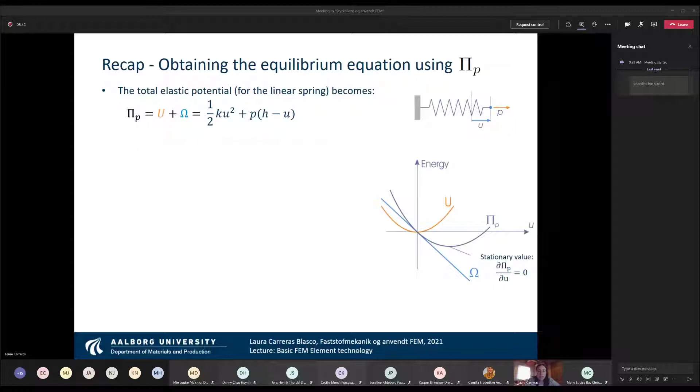So here we have some self-evaluation questions that we can discuss after going through this recap. But before that, I would like to know if you had any questions with respect to the principle of minimum total potential energy that you did last lesson with Simon, and the exercise using it to obtain the stiffness matrix of a system made of two springs, like this one here. You were asked to solve this system and find its stiffness matrix using the principle of total potential energy. Did you reach the solution?

More or less. I think we had trouble with the very last part, about isolating P and building the matrix itself. So you know how to get the equations, but converting the equations into matrix form is the step where you had some trouble. Yeah, okay.

So in the video you also have these slides, with a brief explanation on how to obtain the equations. But I will go through them quickly, just in case some of you didn't reach the point of getting the equations, okay?

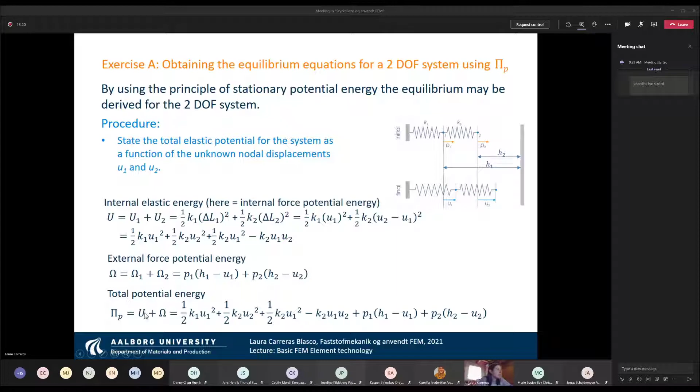In this way, we obtain the external force potential energy, and the total is the sum of these two. So here is the same equation as in this slide. And then we need to find the derivative of this expression with respect to both the displacement of point 1 and the displacement of point 2, because we need to do that for all the degrees of freedom of the system.

If we derive this expression with respect to displacement U1, we obtain this term here. And if we derive it with respect to the displacement of point 2, we obtain this term here.

And then it's just a matter of converting these two equations into matrix form. To do that, we need to first isolate the forces. In this case, the forces are quite isolated because there is nothing multiplying them. So if you just pick P1 here and move it to the right hand side of this equation, you will have it isolated here.

And then you can do the same for the second equation — this force is not multiplied by anything else, so it's just a matter of translating it to the right-hand side of this equation. So then you have both forces on the right side. Then it's a matter of finding what is multiplying the displacement of point 1 and what is multiplying the displacement of point 2.

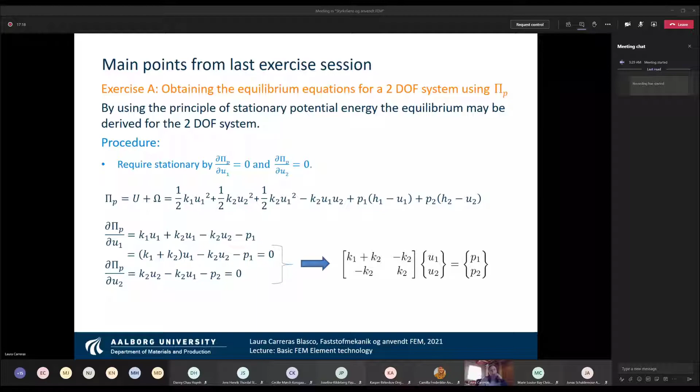Okay, that makes sense. And then I guess that these questions, you already answered them with Simon. Did you have time to answer this question with Simon? Otherwise, we can very quickly comment them.

So it was asked, the facility for listing reaction forces is used. Why is this a good way to check your model? Always checking the reaction forces is useful to check if the boundary conditions were correctly applied, because the reaction forces need to be always equal to the boundary conditions. It's also useful to check if you applied the correct units, which is a mistake usually made, because when you apply the boundary condition, sometimes you don't pay attention to the units, and maybe you want to apply a displacement in millimeters, and you ended up doing it in meters, and you don't pay attention to that.

So if you check the boundary conditions, the reaction force is a good way to check if you did it well in the definition. And then, the assembly is made for several individual parts. Does the generated mesh account for this? Yes, it does. By default, all the parts that are touching together are meshed together, so they are sharing nodes. They are modeled as if they were bonded, so they act together.

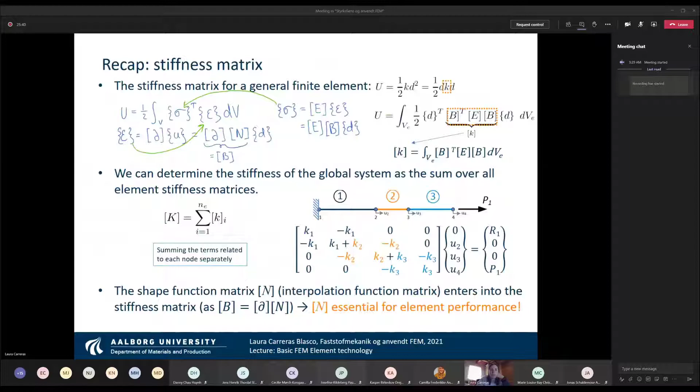Do you have any other question from last lecture? So do you have any question regarding all these concepts presented here? Okay, so I guess that silence means no.

So let's start with the topic of today. Today we will see different element technologies, okay? Basically we will see three types of elements: the solid ones, the beam ones, and the shell ones.

Let's start with the solid ones, which are the ones you already saw. The solid ones make no simplifications in terms of the degrees of freedom, so solid is what you have seen until now. You have a complex geometry that comes from reality, and that geometry you split into different elements, and each of these elements is what we call a solid element.

If we perform a 1D simulation, we will have only 1 degree of freedom per node. So for instance, if we had this element here, this node can only move in this direction, and this node can only move in this direction, because we are in a 1-dimensional simulation.

If we are in a 2-dimensional simulation, we will have 2 degrees of freedom per node — in this case, the horizontal and the vertical direction, for each of the nodes of the element. And if we are in a 3D simulation, we will have 3 degrees of freedom per node.

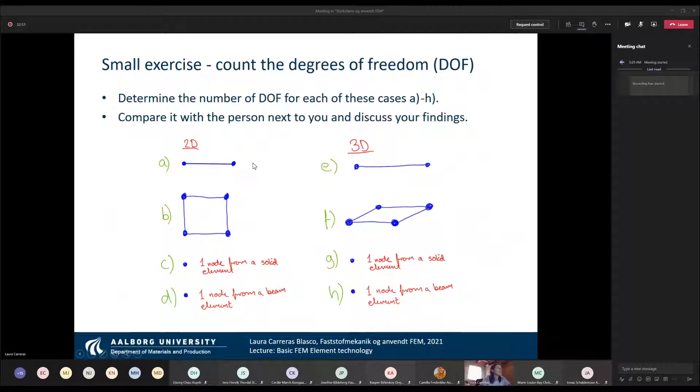But if we sum beam plus truss, having what we call frame element, let me look for it. Here we call frame elements the summation of a truss element or bar element and a beam element. So in 2 dimensions, we have these 2 degrees of freedom plus these 2 other degrees of freedom, allowing not only vertical displacement but also deformation in the axial direction.

And in 3 dimensions, this is translated into 6 degrees of freedom: the 4 degrees that come from our definition of beam elements, plus axial deformation and torsion. This is called in SolidWorks as beam, so it's a little confusing, but it's noted here. What we call frame elements, the summation of truss plus beam elements, is called beam elements in SolidWorks. So your question was right.

It depends on how you define beam elements. If you look it up on the internet, you'll probably find that beam elements are these ones, according to SolidWorks nomenclature. But if you use the definition of beam elements from these notes, you'd have to answer that it only has 4 degrees of freedom. Is it more or less clear?

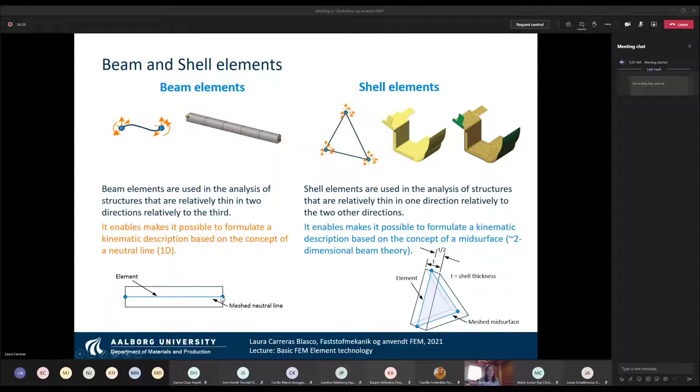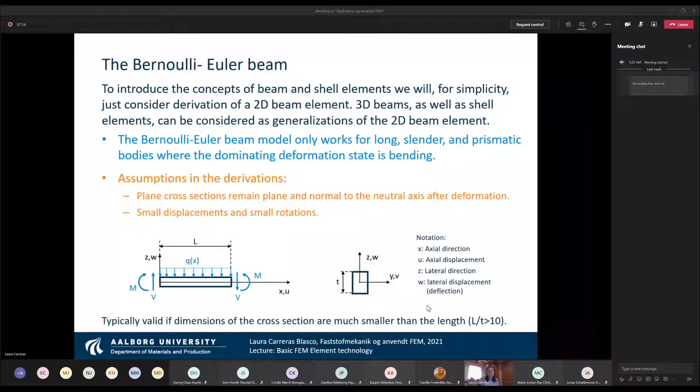How is this done? This is done by applying what is called Euler-Bernoulli theory, based on this theoretical explanation here. This is for you to know where these equations come from. It's not essential that you memorize all this theoretical explanation — you will not be asked to do all this development.

Of course, it's always more gratifying for you to know where these things come from, and to see that it's not magic what is done here — everything has an explanation behind it. But you don't have to memorize all this development; you will not be asked for that. I just want to make sure you can see where all these simplifications come from.

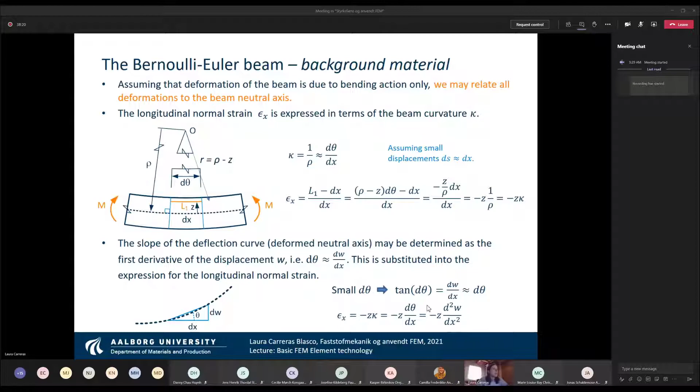The important thing here to know, not to memorize but to understand, is that the strains - we are again at the same point, right? So we are here calculating the stresses. We are always interested in obtaining the stresses, and then comparing them to the material properties. So how do we obtain the stresses?

Again, from Hooke's law, we need to obtain the strains. And how are the strains obtained here? Before they were obtained directly from the derivative of the displacement, but in this case we have to calculate the double derivative of the displacement, and it will also depend on the coordinate with respect to the neutral axis.

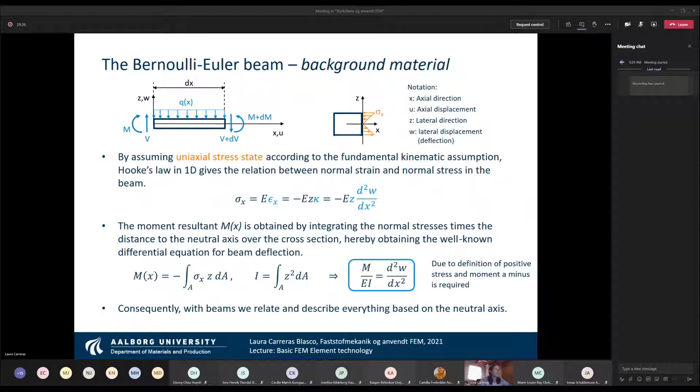And here there is again a quite long demonstration on how the stiffness matrix of a beam element is obtained. There are two ways to do that. The first way presented here is where we say, okay, we have this beam element where there are 4 degrees of freedom, so 2 per node.

We have the displacement and the rotation at node 1, and the displacement and the rotation at node 2. So we have 4 degrees of freedom. This means that in the displacement vector we will have to have 4 spaces.

And then how many forces can we apply to this element? We can apply a force and a moment at node 1, which are these 2, and a force and a moment at node 2, which are these 2 here. So we now know that the stiffness matrix will be a 4 times 4 matrix. So we need to obtain in total 16 coefficients of this matrix. How do we do that?

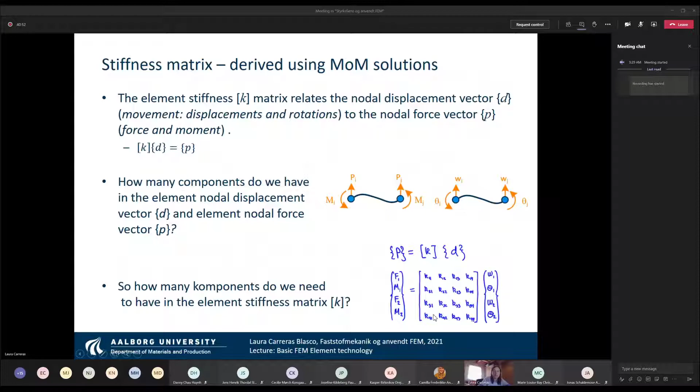The first way to do that is to assume that in this beam we only apply a displacement at node 1. If we only apply a displacement at node 1 and keep all the rest of the degrees of freedom to 0, we will have that the vector of degrees of freedom is this one here: 1, 0, 0, 0, because only the displacement is different from 0.

We can do a second case where instead of a displacement, we apply a rotation. So in this case the displacement vector will be 0, 1, 0, 0, and the same for node 2.

So for instance, for case 1, where we only have a displacement applied at node 1, we will have this equation here - we take this vector and substitute it by this one. This means that this part of the matrix doesn't account, and we only make use of the first column of the stiffness matrix. So F1, M1, F2, and M2 will be the product of this vector here by this vector here.

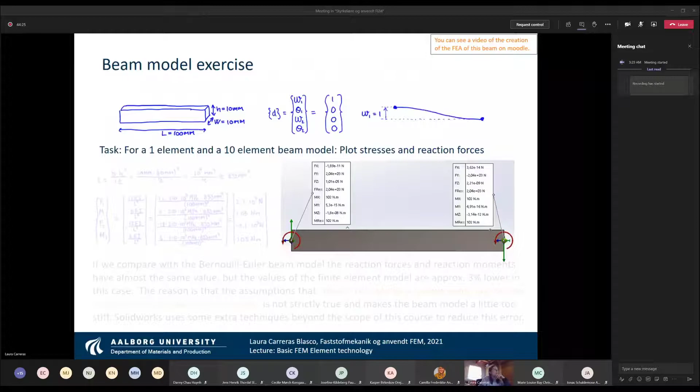But anyway, it's long but it works, and with that we obtain the stiffness matrix of a beam element. Then if we substitute for a real case, where for instance we have a quadrilateral section of 10 times 10 and a length of 100 millimeters, we will obtain these results here.

And if you do that also in SolidWorks, you will obtain very similar results. You have a video in Moodle where this exercise is solved in SolidWorks. If you follow the video, you don't have to do it yourself, but if you watch it quickly - it's only a few minutes long - you will see that the results are very similar to the ones we obtained manually.

You can see here that there is approximately 3% error between the solution we obtain manually and the solution from SolidWorks. For instance, here in SolidWorks, we have that the reaction force in Y is 2.04, and here it is 2.1, okay?

This is because in SolidWorks, the theory behind it is not as simple as the one we describe here, but it also includes an extra formulation in order to account for the rotation of the cross sections. With our theory explained here, we assume that the cross sections remain plane, and this leads to this very low error when you compare both results.

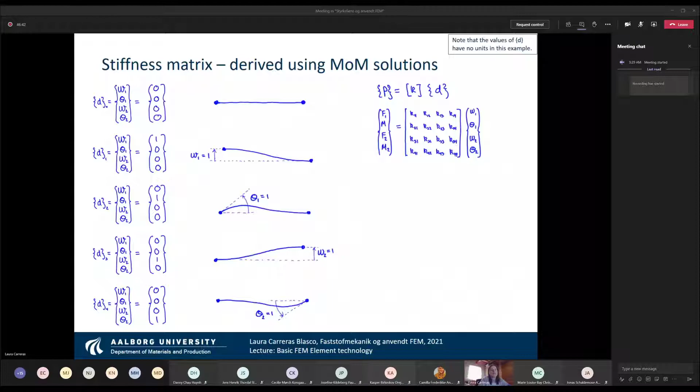Again, you don't need to know all this derivation here, so you will not be asked to obtain the stiffness matrix of a beam element by using all these cases from mechanics of materials. But what you will be asked is what is asked in the self-evaluation questions, that is, for instance, which are the basic ingredients used in the derivation of the stiffness matrix of a beam element. So you don't have to know all this development, but you have to know that in the stiffness matrix, you have the Young modulus, the moment of inertia, and the length of the beam element.

Before that, a brief mention of which kind of shape functions we need to use for a beam element. In this case, we need to use third order shape functions. Why? Because if we look at the solution from mechanics of materials of the displacement along the coordinate x, we see that the displacement is actually of third order degree. So if we use a shape function of a degree lower than 3, we don't have a correct representation of the displacement along the length of the beam. That's why we need to use a third order degree shape function. Do you more or less understand that?

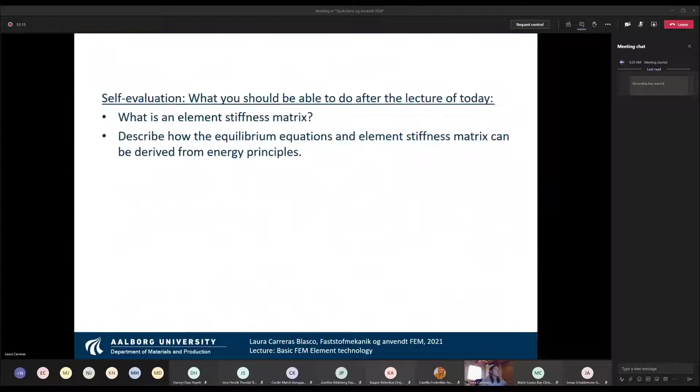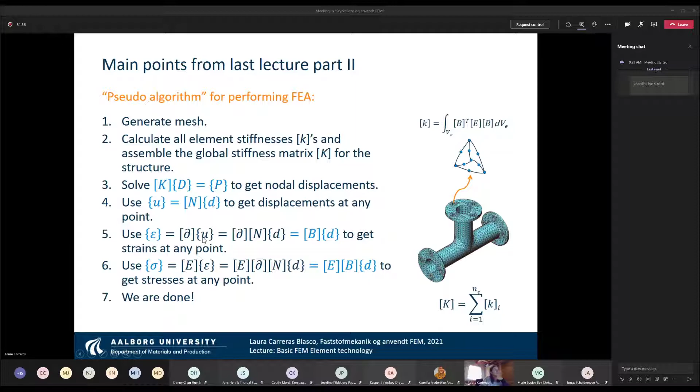So let me recover that slide. We have that the displacement at any point inside the element is the shape functions times the nodal displacement. And for the strain, which is the derivative of the displacement, we have that the derivative of the shape functions times the nodal displacement equals the strain. If we group these terms, taking the derivative of the shape function, we obtain what we call the B matrix. Remember this, that the strains are the derivative of the displacements.

In the case of a solid element that holds, but in the case of a beam element, we have that the strains are minus the coordinate from the neutral axis times the curvature. And the curvature is the second derivative of the vertical displacement. So this means that actually the strains here are not the derivative of the displacement, but they are the double derivative of the displacement.

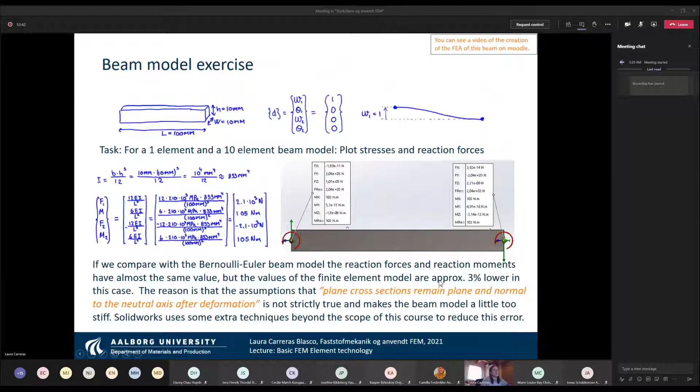And if we solve this integral, we obtain the same stiffness matrix as we obtained previously by doing this derivation, but this is not easy to do manually, so this is why you have how it is derived by making use of Maple, a calculation math program. If you had to do it manually, it would take some time. But again, this is not the main topic here.

The main topic here is to remember that the key ingredients in obtaining the stiffness matrix are, again, the Young modulus, the moment of inertia, the length of the beam element, and also the kind of shape functions that we use. A key point is to remember that when using beam elements, we need to use third-degree shape functions. Otherwise, we don't have the proper representation of the displacement along the length of the beam element.

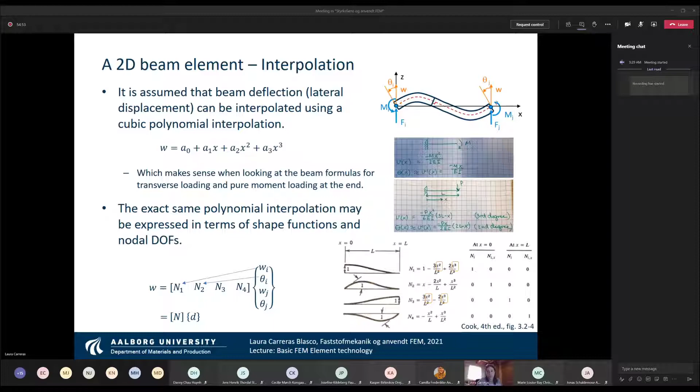So these are the key concepts here. It's not actually important going through all this integral, which can finally be solved by using a mathematical program, but what is important is to remember to use the proper shape functions, and that these are the key ingredients that are used to build the stiffness matrix.

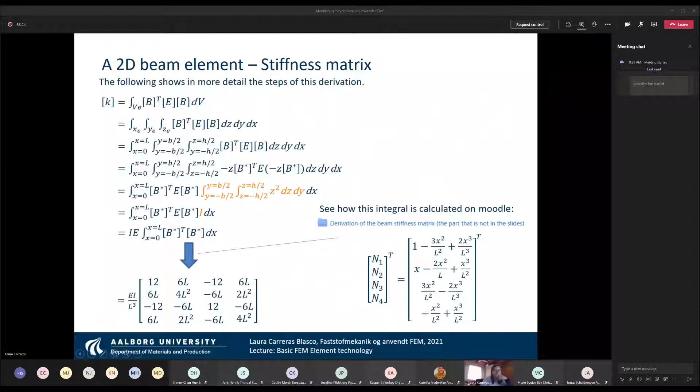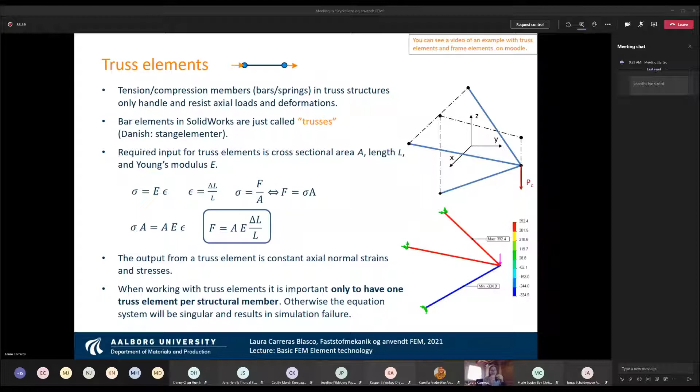Then we talk about truss elements, which are those that can only support axial deformations, so they can only be compressed or tensioned. And as we said before, frame elements are the sum of beam elements and truss elements. So we take the beam elements which can support bending moment and vertical displacement, and then we add the capacity of the truss elements to be deformed in the axial direction.

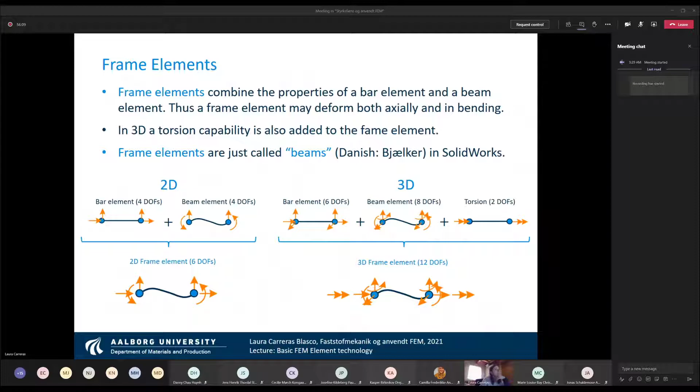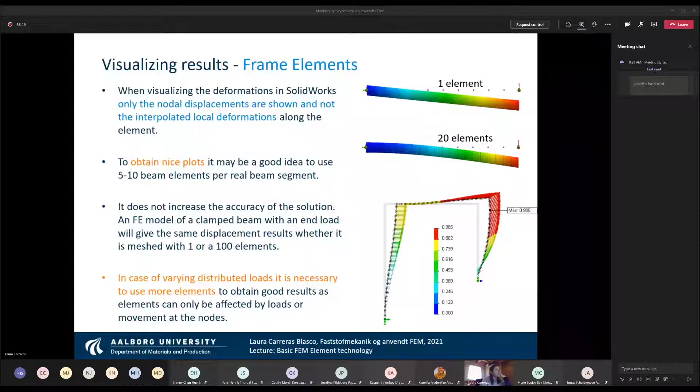Here you finally have some tricks to get simulations of all these kinds of elements in SolidWorks. You will go through all these tricks when you do the tutorials. You are proposed at the end of this lecture to do some tutorials, and in these tutorials you will make use of all these tricks.

Additionally, you have a video posted in Moodle where you can see this example of a chair modeled by shell elements. It's also modeled using solid elements, which is a bad approach, because for obtaining the same results, you use a lot more elements, and in consequence, a lot more computational time. You are not supposed to do this exercise again by yourself, but you can watch the video and see the implications of using solid elements versus shell elements, and how much more efficient shell elements are.

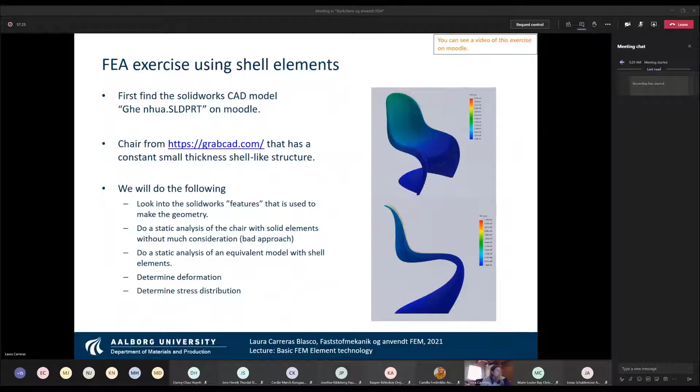We spent 1 hour going through the main concepts of this lecture. And now you have some time to do these exercises.

You can start by using a tutorial about truss structures, these ones that can be only deformed actually in the axial direction. You also have a tutorial about beam diagrams, using beam elements, that is what we call here frame elements, remember? And then after completion of these two tutorials, you can answer these questions.

You can do it in groups. Then you can solve this problem, which you have in the appendix the solution calculated analytically by hand, and you can compare the solution from mechanics of materials with the solution obtained in SolidWorks. Finally, you can also do the tutorial about the shell elements, and after that, try to answer these questions.

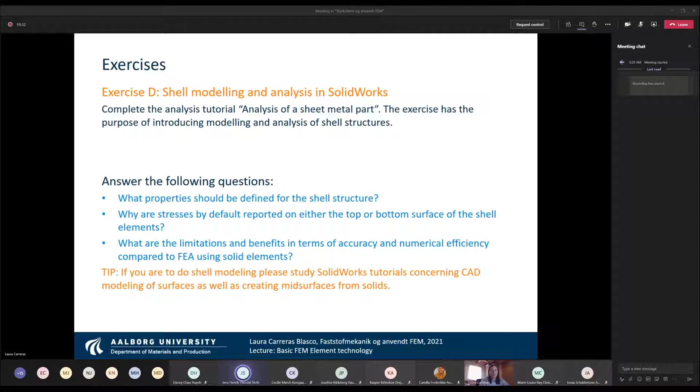I have a question. Will we go through the self-evaluation questions? Yes, do you want to do that now? We've just done that in the previous lectures. Okay, let's do that then.

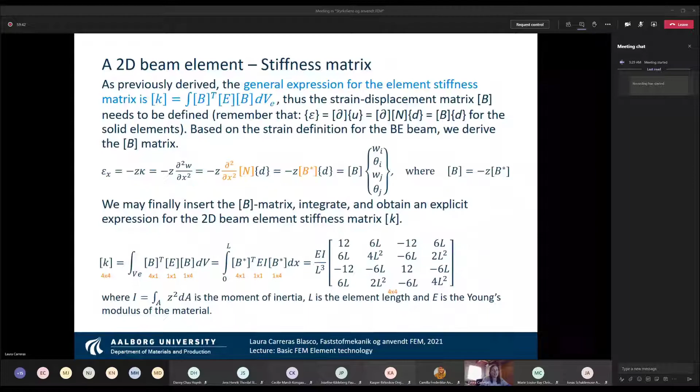I think it's very important to go through the self-evaluation questions because they are more similar to what you will be asked in the exam. It's a way to make sure of what you need to learn from this lecture.

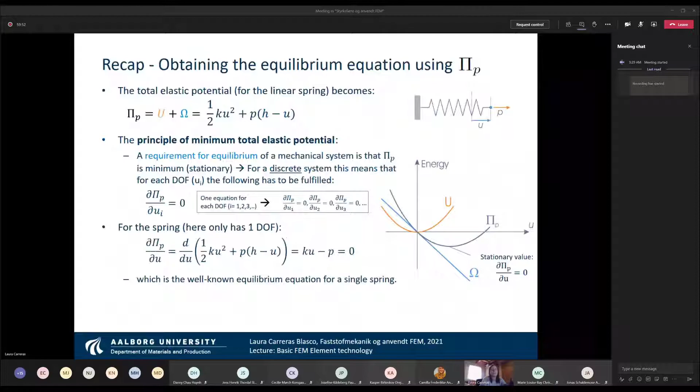So the first one says: classify different element types and describe their weaknesses and benefits. Does any of you want to answer this question?

Okay, well, in this case we can make use of this to list the kinds of elements that we can find. We can find four kinds. We can find solid elements which have no dimensional simplifications, so they have as many degrees of freedom as dimensions in the simulation.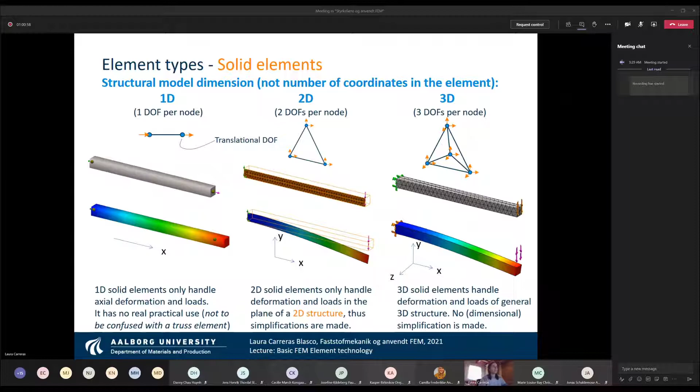Then we have these different technology elements whose main feature is that they reduce complexity. For instance, for beam elements, in order to simulate a beam which is a solid in 3 dimensions, we only make use of a line. We solve all the displacements on the line, and then, using the formulas we've seen, we can find the displacement at any point in the beam.

The same applies for shells. They simulate a solid but only make use of a surface. We solve the problem at the surface, find all the displacements there, and then, using a formulation, we can extrapolate from the surface displacements to the displacement at any point in the solid. So instead of solving a complete solid, we just need to solve a surface, which is much more efficient.

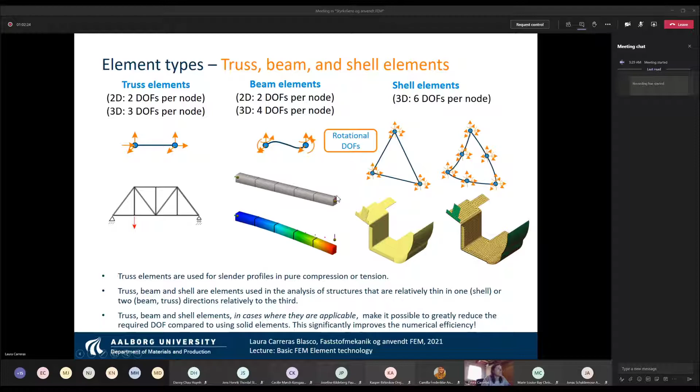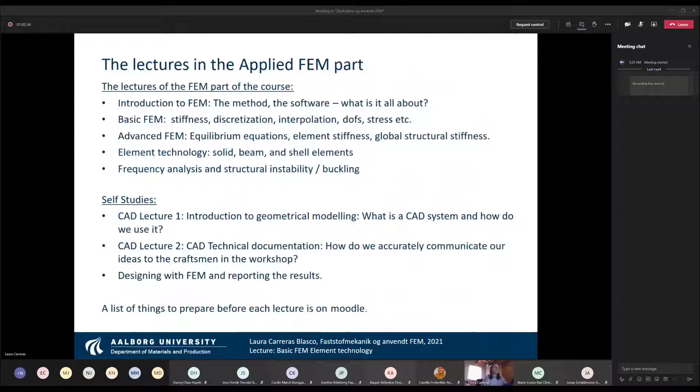So these were basically the kinds of elements we can find. The weaknesses and benefits are that solids don't make use of any simplification, but the computational cost is very high. In the case of truss, beam, and shell elements, they are much more efficient, but we need to be conscious that they are simplifications.

You know that the bending stresses, where they are highest, are at the top or at the bottom. So when we plot the results, we have to check both the stresses at the upper limit and at the lower limit, because the maximum can be either on the top or on the bottom. Since we are only solving the neutral line, we have to be conscious of this and check both.

You will see, if you go through the tutorial, that in SolidWorks there's a way to represent the stresses that automatically selects the higher one. You will also have the possibility to plot the stresses all through the section, so you can see both the top part and the bottom part at the same time, and visually see which is higher.